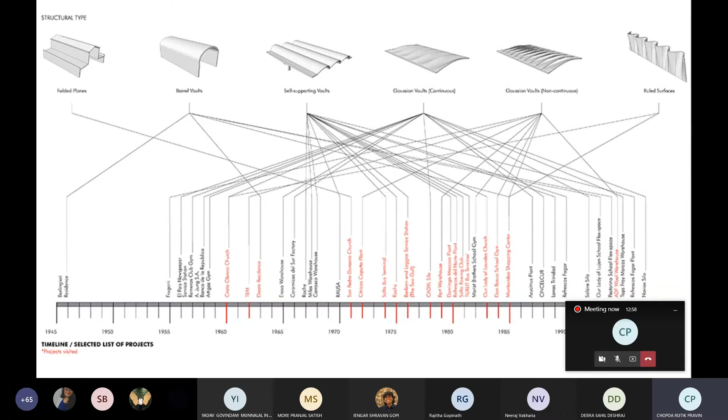This is a timeline we got from the internet, which shows various structures built in various years by the engineer, and it shows the particular roof styles he used in most of his structures, which were unique in their own way. In the next slide...

The material he used was brick, almost exclusively, as the primary structural material for his projects. Bricks are an indigenous material, and they also had advantages over concrete: they were lighter, hence less reinforcement and formwork were required.

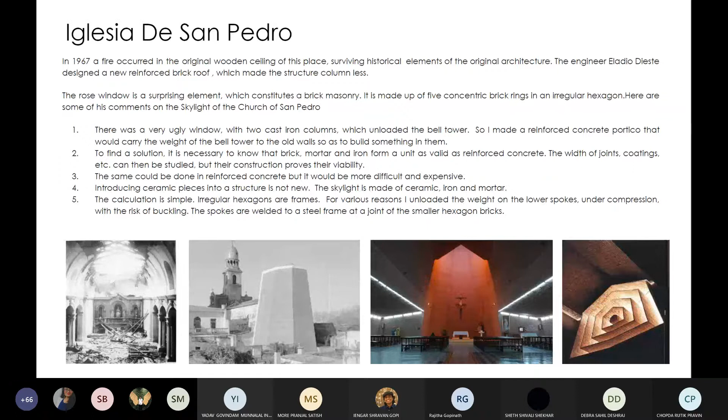The next part we are looking at is the Gaussian vault, one of the innovations that the engineer had done. The Gaussian vault is basically a double curve geometry. Its shape is based on the catenary, resulting in mainly axial compressive forces, whereas most thin wide span roofs have been built using concrete.

Yes, they used brick. And unlike traditional masonry vaults, there is only one brick layer in thickness. There is no separate structure required for this structure of the roof.

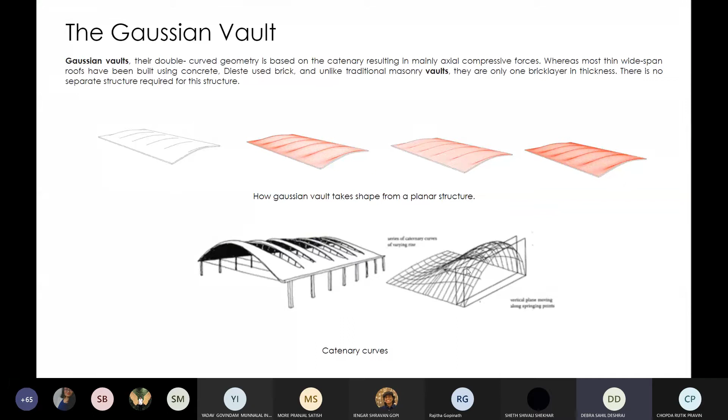In the first image, we can see how the continuous Gaussian vault takes shape, and the other one shows the non-continuous vault. This third picture shows how the catenary curves are taken into consideration while he designed the Gaussian vault.

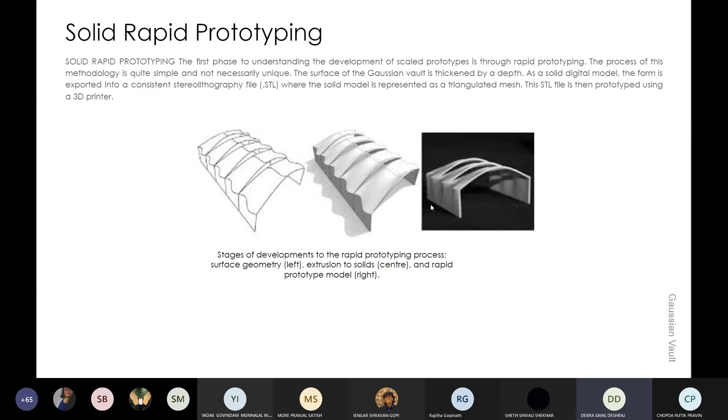There are two different methods of prototyping this vault that he used. The first phase is to understand the development of scale prototypes through rapid prototyping. The process of this methodology is quite simple and not necessarily unique. The surface of the Gaussian vault is thickened by a depth. As a solid digital model, the form is exported into a stereolithography file that is used for 3D printing, where this solid model is represented as a triangular mesh, and then it is 3D printed. These are the stages used for the development of the digital model.

This picture shows how the geometry of the surface is designed, where two sides of the edges of the Gaussian vault are straight lines, and these catenary curves are then made to form a surface of this shape.

The second method is surface prototyping. This method involves experimentation with surface geometry using planar strips. The picture we saw last time is more related to surface prototyping. The smooth curvature of the Gaussian surface is developed into a planar polygon mesh.

To achieve this, the smooth surface is developed using a grid of points applied across the surface geometry. This point grid is then joined together to produce a polygon mesh. Each band of the polygon mesh is then unfolded into a triangulated planar strip. Two planar strips were developed in the lateral and longitudinal direction of the surface geometry to facilitate an accurate, discrete representation of the smooth surface.

This was achieved by switching the skin direction of the surface such that the paths became profiles and profiles became paths. The fabrication of the planar strips involved two distinct sets of vector lines: a set required to cut and a set required to be engraved. With a device such as a laser cutter, each set of vector lines could be distinguished, allowing the production of individual planar strips.

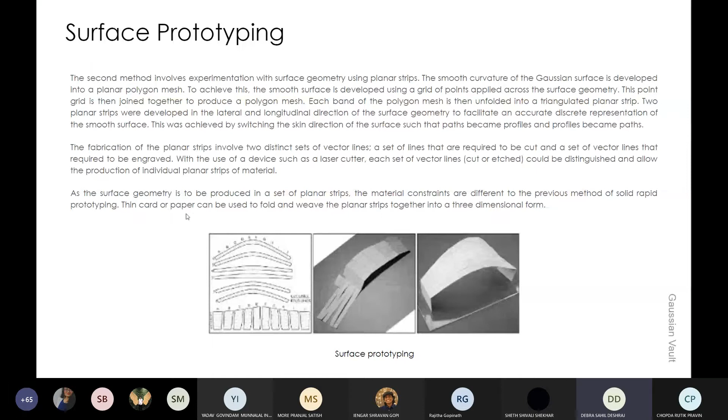As the surface geometry is to be produced in a set of planar strips, the material constraints are different to the previous method of solid rapid prototyping. Thin card or paper can be used to fold and weave the planar strips together into a 3D form. So this is how the form in a prototype is developed.

Then we tried developing a prototype using dough, where we kept a wire mesh. We folded the wire mesh into the shape of those catenary curves approximately, and then cladded it with dough and let it dry. When we removed the wire mesh, it kind of took a similar shape.

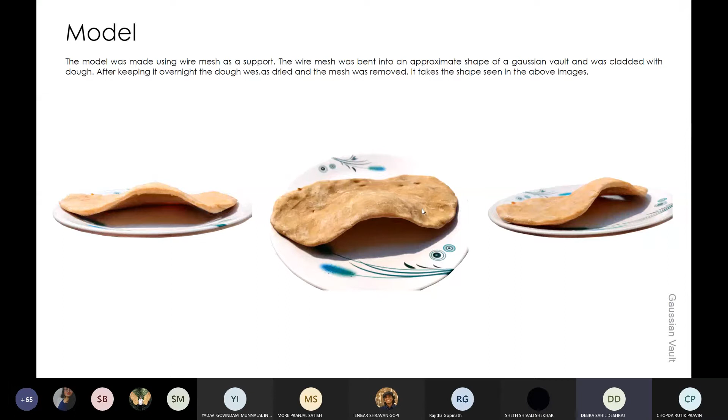There are various projects where the Gaussian vault is used. There are some warehouses, and one of the prominent projects is the Don Bosco Gymnasium. The span of the roof is 25 meters, whereas in the warehouse it ranges up to 50 meters.

The next thing we focused on was the freestanding vaults built by Dieste. The freestanding vault is a single curvature vault that requires a relatively simple formwork to construct, with fewer vertical supports. Dieste envisioned these vaults to float above the wall with very few vertical supports, as you can see in these projects.

The first one is the Refresco del Norte, a double cantilever freestanding vault on two columns arranged in a straight line. The second one is the Salto bus station in Uruguay, where a series of vaults are supported on a single strip of vertical columns.

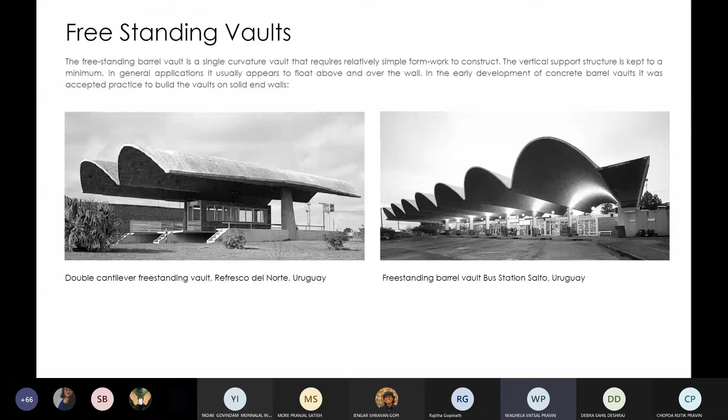Earlier, it was believed that vaults should be supported on end walls or stiff arches to avoid unnecessary and costly buttresses or interfering tie rods.

In Dieste's application, it is seen that he tried something different, wanting to support the entire vault onto a single strip of vertical columns, giving it a light floating element, as in the buildings. He used these kinds of vaults in many large-scale workshops, factories, and warehouses. The cross section is mainly a catenary curve, and the freestanding barrel is used in shorter transverse spans between the springings, up to 10 to 12 meters, with a span-to-rise ratio not greater than 4.

So it is deeper than the Gaussian vault that we saw earlier, and due to this greater depth of the vault and the shorter span, the stresses in the brickwork due to self weight are greatly reduced. Therefore the risk of buckling is not significant, and the vault adopts a simple curvature between springs.

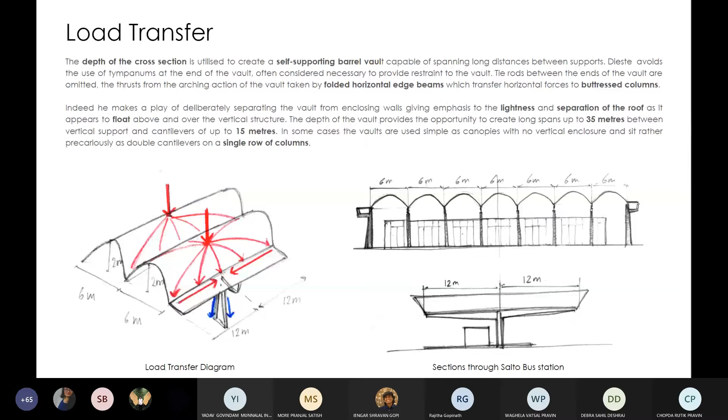So we focus on the sequence of construction in vaults. First, the construction of the supporting column takes place, with reinforcements projecting out of it, to which formwork is attached, on which the bricks are laid in a stack bonded manner, with joints typically 20 millimeters wide. Then come the longitudinal and transverse reinforcements.

Reinforcement of 5 to 6 millimeters in diameter is placed in the joints, over which a cement-sand mix is poured. The brick absorbs moisture from the mortar and starts to stiffen almost immediately. The formwork is usually struck the following day, depending on weather conditions. The edge beam is propped both vertically and horizontally.

As the formwork is stripped, the self weight of the vault is transferred to the props by the action of the catenary arch. The formwork is then moved to the next section, usually sitting on steel rails, raised and lowered on mechanically driven jacks. Great care is taken in aligning the formwork to the previous section of the vault, to facilitate continuity of the reinforcement and the visual integrity of the soffit of the vault, usually left as exposed brickwork.

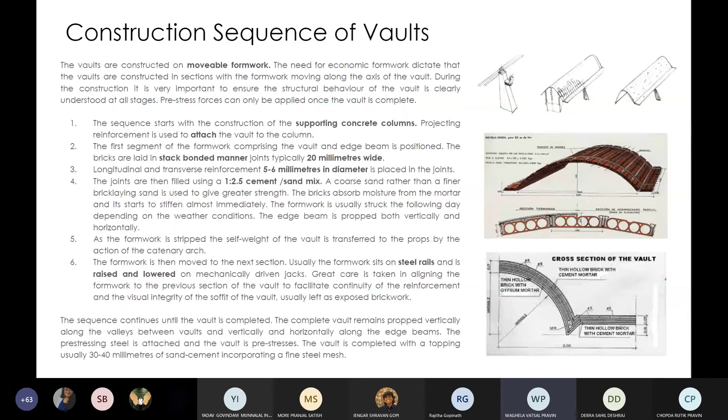So after construction of the vaults, he really focuses on pre-stressing the vault, so that it can counteract the stresses that occur when subject to loading. Pre-stressing is done along the crown of the vault, and also applied at the junction of the edge beam and the vault, or the valley between the vaults.

This shows the pre-stressing along the crown of the vault. He developed a method of using welded loops of steel, placed on the crown of the vault and anchored using steel reinforcements bonded into the vault at each end. Between these ends, the loops are free to move. Pre-stress is produced by pinching the wires together at the midpoint of the loops and stretching them into a figure of 8. This tension in the wire pre-compresses the vault.

The length of the loops and the distance between the long sides determine the level of pre-stress. Once the wires achieve the required extension, they are held in position by metal clamps. The wires are then covered by a thin concrete screed.

By adopting this technique, the benefits are that the pre-stress force is distributed over a large area at the anchorage, avoiding high local stresses. The pre-stress is held within the thickness of the topping of the vault, and is applied using a very simple jack without hydraulics, which can tension a number of wires simultaneously. The diagram here shows the condition of the crown before pre-stressing and after pre-stressing.

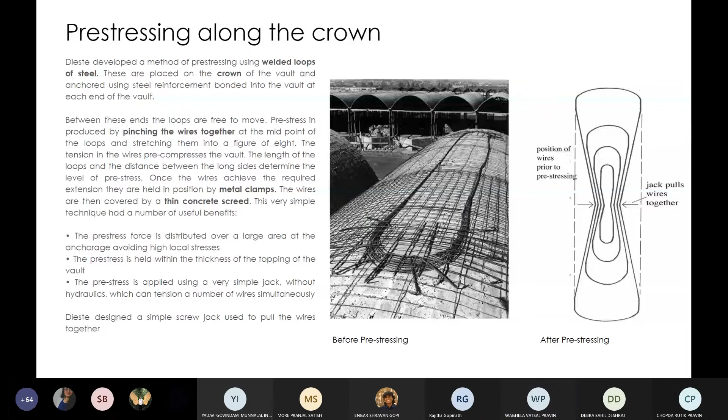Pre-stressing is also done at the edge, but a different system is adopted here. He uses overlapping loops of pre-stressing steel with their ends anchored firmly into the walls, and again he has developed a special jack, which is seen here in the diagrams.

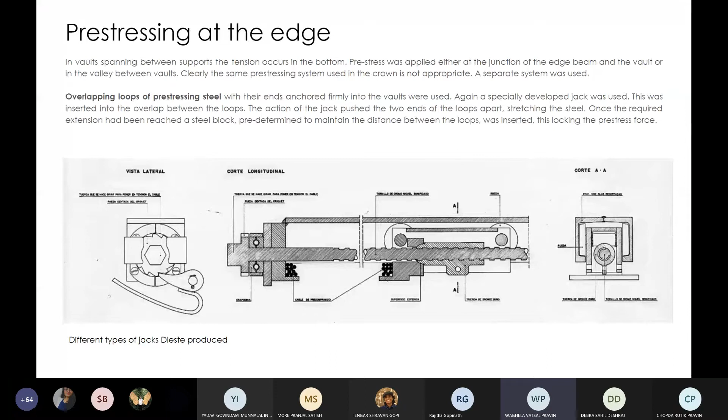The vault is again pre-stressed over the crown and at the edges, and the thickness of the vault is kept around 100 millimeters, comprising a rectangular extruded hollow clay unit of 70 millimeters, on which 30 millimeters of sand cement topping is provided. The maximum width of the edge beam is 2 meters.

Typical of many of Dieste's buildings, there is clear visual separation of the roof from the walls, so that the structure can be seen as lighter. The roof is also supported on a series of concrete columns independent of the enclosing walls. The space between the underside of the walls and the roof is enclosed using glazing, particularly noticeable at the gable, to clearly show that the walls offer no support to the roof.

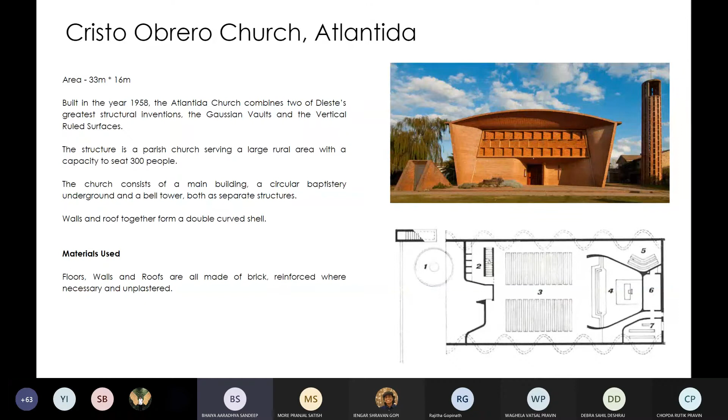The walls and roof together form a double curved shell. The material he used for the floor, walls and roof is all brick, reinforced where necessary, and left unplastered.

The walls have a height of 7 meters, and their thickness is 300 millimeters even all around. The reinforcement used in the walls was steel wires of 1/8 of an inch, and the cavities were filled with waterproof mortar.

The walls are formed by conoidal surfaces, straight on the ground and undulating at the top. Each wave consists of a central segment of a parabola and two half segments. The wall is crowned by a very thin beam, constructed of brick and concrete mixed together, which forms the eaves and takes the thrust of the wall.

In this sketch, we analyzed how the beam actually helps in stabilizing the wall.

This series of circles and the curves joining their edges shows how the construction took place, how the form and curves of the wall took place.

In this sketch, the forces F1 and F2 act over a wave. F1 is the force exerted by the crest of the wave, and F2 is the force exerted by the trough. We analyzed that the resultant of these two forces stabilizes one complete wave, and thus the entire wall.

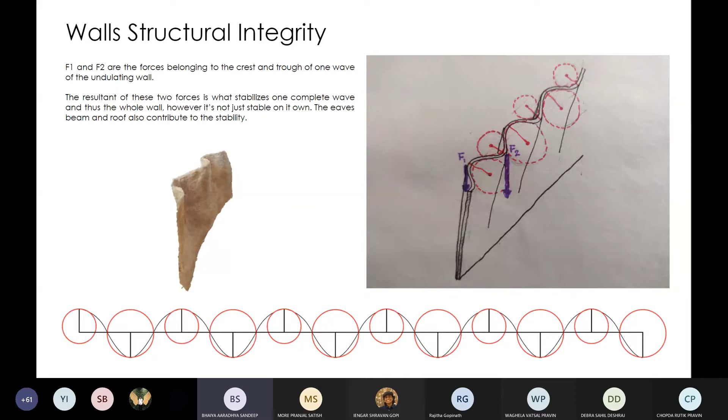This is a detail at the eaves. At some places the eave protrudes a little more, and at other places it protrudes a little less.

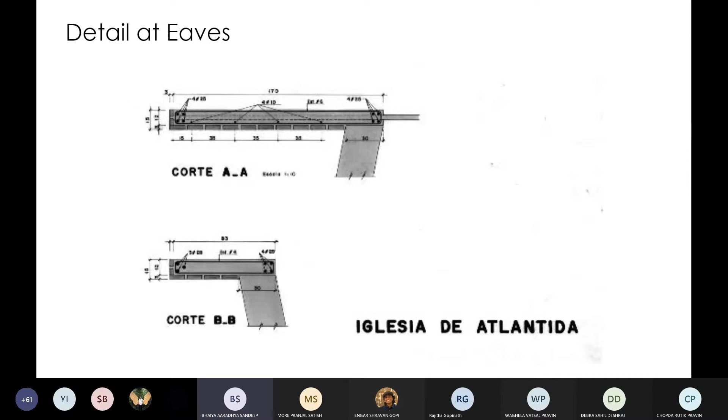So the roof has a mean span of 16 meters, and its thickness is just 110 mm. It's very thin and appears to be very light, and it's a Gaussian vaulted roof. The rise of the roof varies between 70 mm to 1475 mm.

The roof is a continuous Gaussian vaulted structure with an aperture in the center so that light comes in, and the wave valley is almost horizontal. The tensors are anchored to the beam, the eaves beam at the top of the wall, and they also help in absorbing the thrust of the wall.

Together, the vault forms a shell with two hinges, which has great transversal rigidity, and the union between the ruled surfaces of the roof and the walls introduces a particular instability that causes a strange effect of the layers of brick inside when a person looks at it from the inside.

So in these sketches, we analyzed how a normal roof with a typical design would take the load. Over there, when the edges are very sharp and the walls are perpendicular to the roof, that is how they take load.

However, in this case, the load is evenly distributed, and the slant and undulating surface of the walls is actually stabilized by the load coming onto it from the eaves beam and the roof, and that is how it gets stabilized.

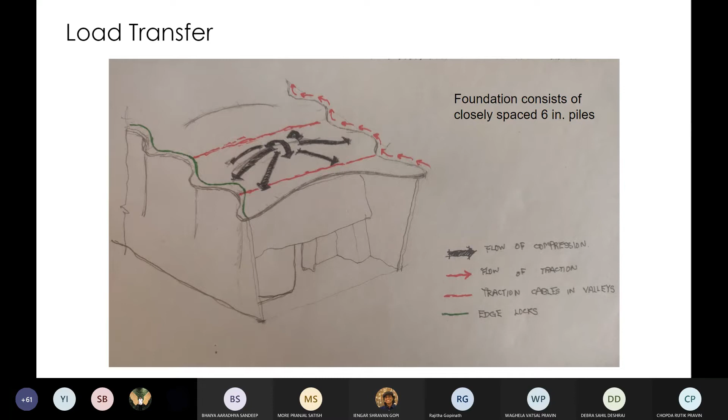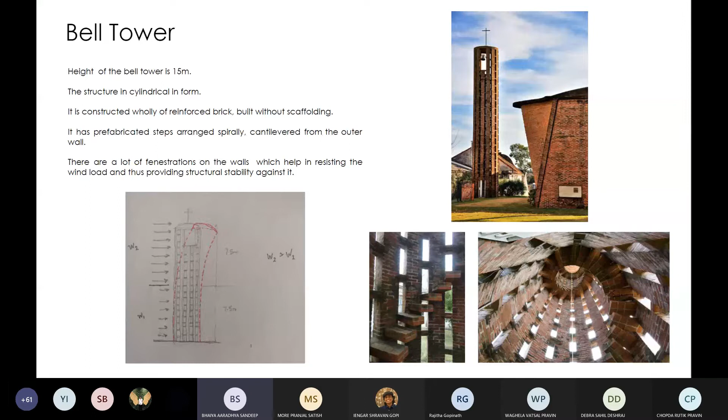Yes, and these are the references, the websites we provided. Thank you.

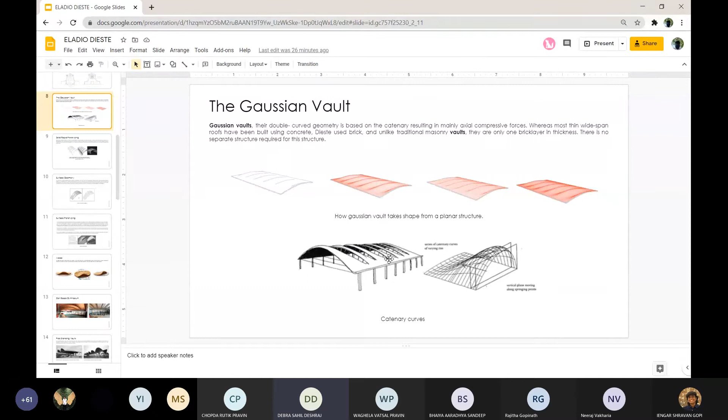For example, if we look at this structure in the gym that they've made, the basketball court, you can see how light is entering through that part of the roof. Right, so it acts more like an arcade than an actual barrel vault, a mix of an arcade and a barrel vault, does it? Yeah. Okay, thank you.

Atharva had a question. Can you just go to the next slide, the 14th one? Yeah, so I didn't understand these freestanding vaults, how the cantilever really works, that I didn't understand.

Yeah, Sahil, can you go to the 17th slide? It would be easier. Atharva, here, can you see the sections through the Salto bus station?

Yeah, so here what he has done, he has used a single buttressed concrete column, which is very big, and to which a large edge beam is supported, and onto which there is a light brick vault, which is catenary in nature. So that transfers the load equally to the edge beam, which transfers again the load to the vertical buttressed column.

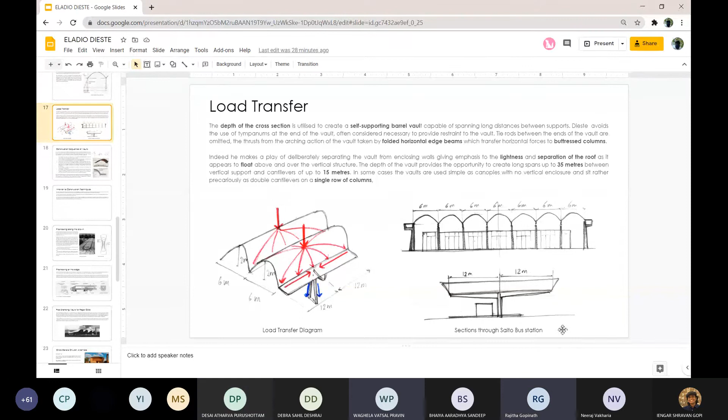If you go to the previous slide, where he's using the butterfly vault over a petrol station or something, it is not equally spaced, it is off center.

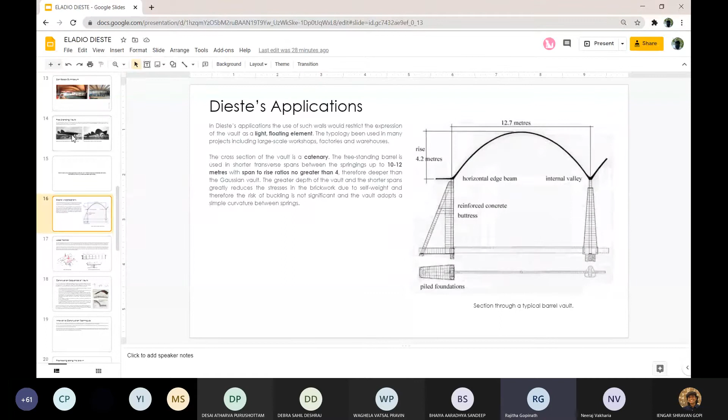Go to the previous one.

This one, the freestanding structure shown on the left side, that's not centered, right? Yeah, off center. That's why I was asking. Yeah, this is off centered, right?

It is meant, I think, for a petrol station or something like that. Yeah, how does this work? So, does somebody else have a question here?

Nobody else has any question.

Okay, yeah, just explain how do you think this has been supported?

Yeah, Vatsal, go ahead.

I was saying that the concept he used was similar in all of the vaulted structures that he used, but here I think there are only two double cantilevers in a freestanding wall, he has achieved the irregular cantilevers on both ends.

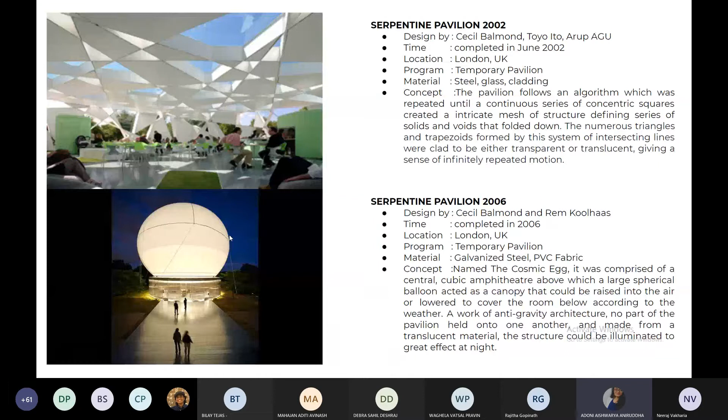This is Aishwarya. Serpentine Pavilion 2006, as you can see the names are the same. Cecil Balmond had this series of Serpentine Pavilions in which he tried to redefine what a pavilion meant. The 2006 one was in collaboration with Rem Koolhaas and completed in 2006. It was a temporary pavilion, and the focus of this pavilion is the cosmic egg, used as a canopy over the pavilion, which could be raised or lowered according to the climate or the time of day.

Hello, Tejas. Hello, can anyone hear me? Can everyone hear me? I can hear you, but I can't hear Tejas. Okay, I'll continue from where he got disconnected then.

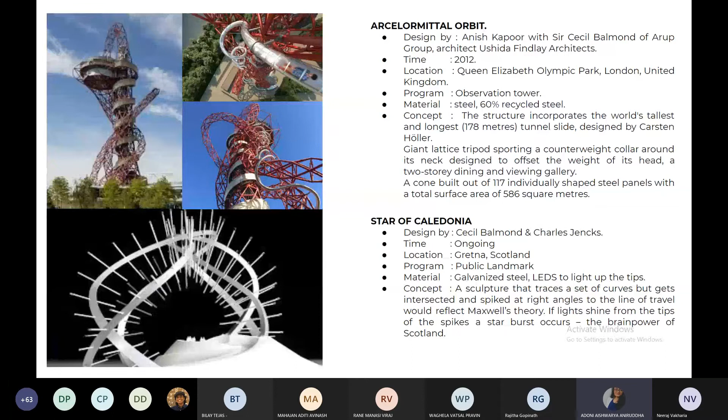The Star of Caledonia is an ongoing project in Scotland, a sculpture that traces a set of curves with spikes at perpendicular angles which light up because of LEDs stuck on the tips. Balmond had this artistic approach, blending art and science to bring about design solutions and solve problems.

One of the major features of Balmond's work is the diagrid framing system, which he uses in a lot of his structures. It's basically a framework of diagonally intersecting beams, which can be of any material. In this system, the load follows a diagonal path following gravity, helping transfer lateral loads to the ground. This transfer of lateral loads is very important in areas with high seismic activity.

There are a lot of advantages to this system over the traditional column and beam system. One is that it reduces the material required by about 20%. Because it's an exoskeleton kind of system, it sits on the external part of the building, opening up the space inside since there are no columns or beams in the middle, providing an open space and open plan.

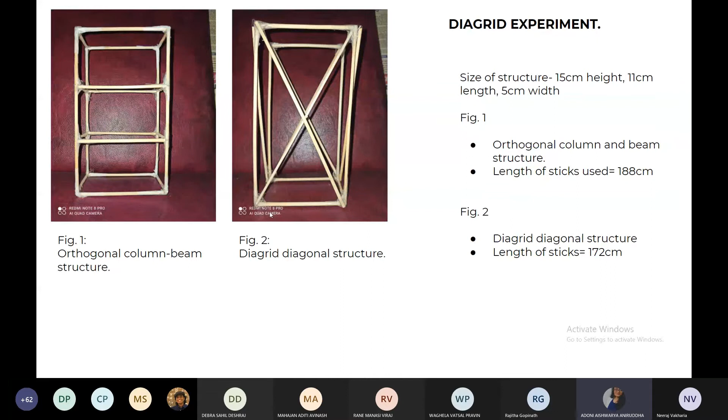The first building by Cecil Balmond which we did a detailed study of is the CCTV headquarters — China Central Television headquarters. It is 243 meters tall and is a three-dimensional loop. It's made of two towers shaped at 90 degrees at the top and bottom, and primary support is mostly provided by the diagrid exoskeleton system, which helps in load transfer. This building was done in collaboration with Arup Group and was completed in 2012.

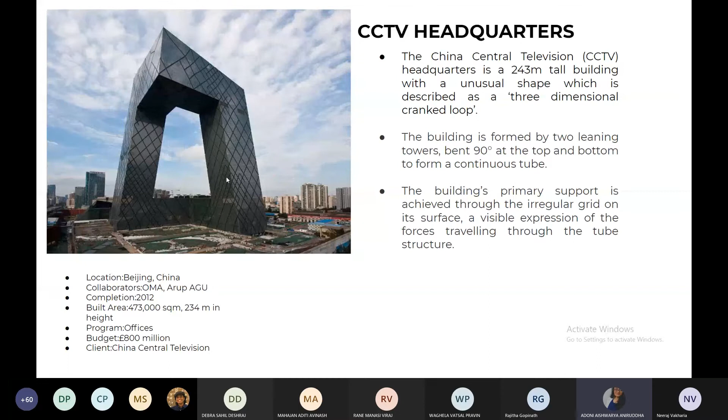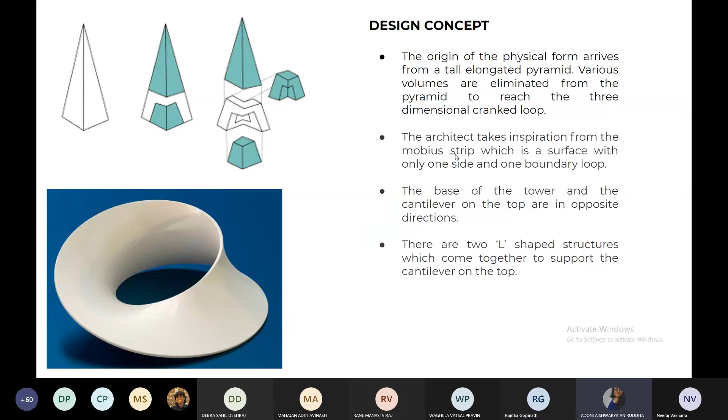The design concept of the building is our analysis of how the form might have come into existence — like an elongated pyramid where mass was subtracted in specific ways. The first chunk was cut off from the top, the second taken away from here, and the third from here, with the two L's in opposite directions. We also thought the architect took inspiration from the Mobius strip, a continuous loop which is one surface with one edge and one boundary. There are two L-shaped structures which also support the cantilever on top. This is how we thought the design concept might have come into existence.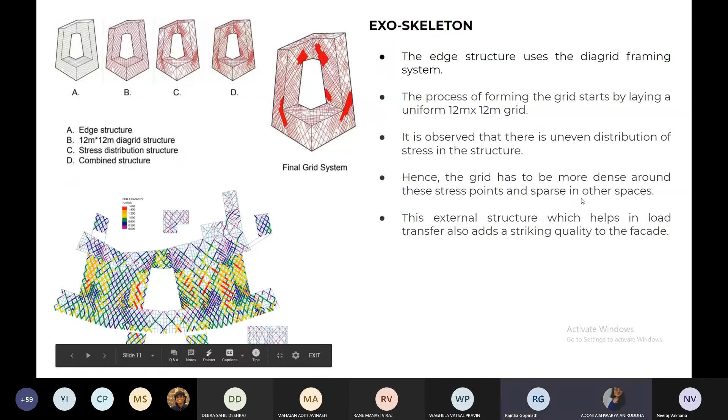As this is a massive building, there were massive loads acting on it. The vertical load consisted of gravity, dead load, and live load. And as this building is situated in a seismic activity zone, they also had to consider those loads in the lateral loads. High wind pressure also acted on this building.

The majority of the load transfer happened through the diagrid, that is through the diagonal members, while the internal cores took minimal amounts of gravity loads. And as it had fewer columns, the floor slabs were free, like it was more of an open plan, and floor slabs didn't take much of the load.

While constructing this, they had to assess wind diagrams of over 100 years, as Beijing's max wind speed is around 11 meters per second.

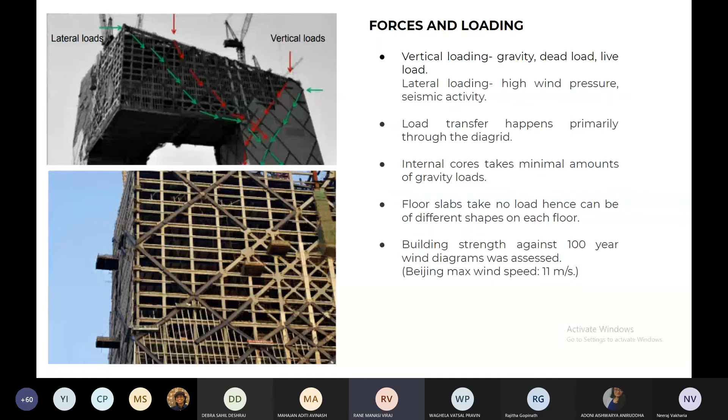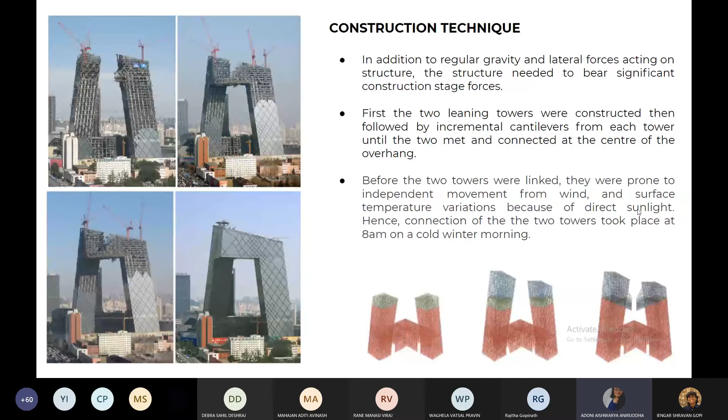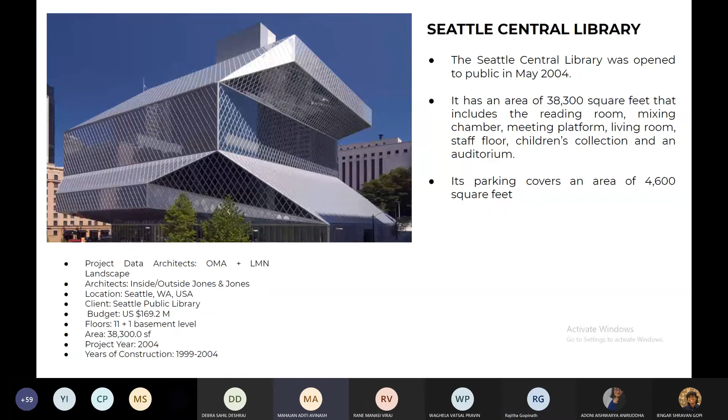So the second building we studied was the Seattle Central Library. Construction started in 1999, and it was opened to the public in May 2004. It has a total area of 38,300 square feet, which includes the reading room, mixing chamber, meeting platform, living room, staff floor, children's collection, and an auditorium. It has a total of 11 floors plus one basement level, and its parking covers an area of 4,600 square feet.

The design concept looks like a stack of books arranged on top of each other. The main intent was to give an illusion of floating boxes with minimum load-transferring members like columns and girders. The concept involves reinventing the library as an access point to information presented in a variety of media.

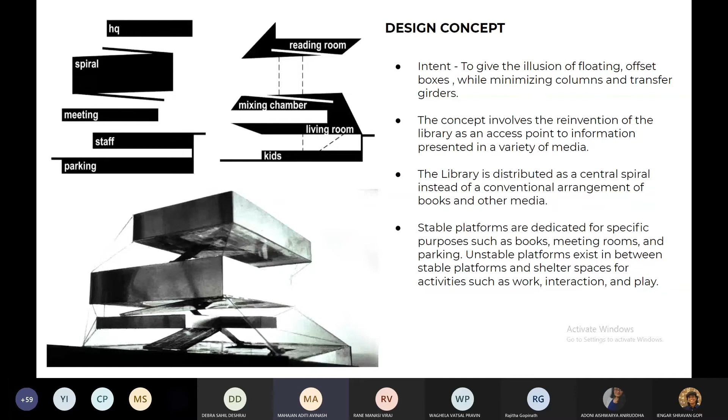It is distributed as a central spiral instead of a conventional arrangement of books and other media, so it has stable platforms and unstable platforms. The stable platforms are dedicated for specific purposes such as books, meeting rooms, and parking, while unstable platforms exist between stable platforms, used for activities such as work, interactions, and play.

The structural system is composed of a load-bearing and seismic system. It has a central concrete core which provides rigidity to the whole structure. The load-bearing system consists of columns and beams which support the cantilevered or elevated platforms, and the seismic structure is for the facade, which has a lattice-like geometry connecting the platforms to one another.

Soil and foundation system: the majority of the site contains stiff to hard silt with fill. The fill is disturbed soil from prior excavation activity, and it is not suitable for foundation support. The foundations used are spread footing foundations, and the core carries gravity loads but resists minimal lateral forces.

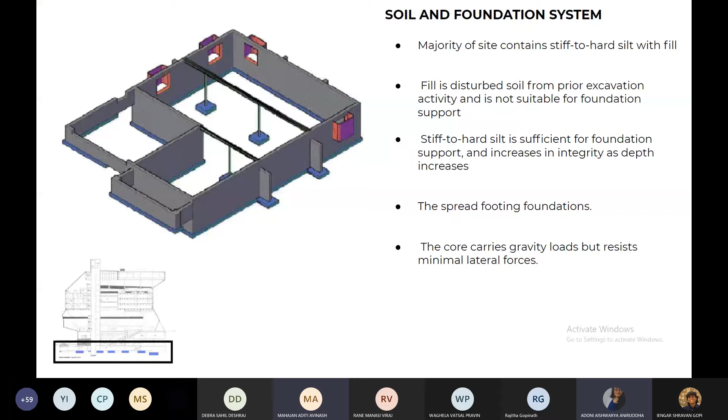To minimize columns and girders, many columns are skewed to connect to each other in plan. Columns at the corners were pushed back to give the floating effect. The skewed columns transfer gravity loads and maximize counterbalancing opportunities, creating a thrust which is then transferred to the floor diaphragm that connects to the central core or to other columns.

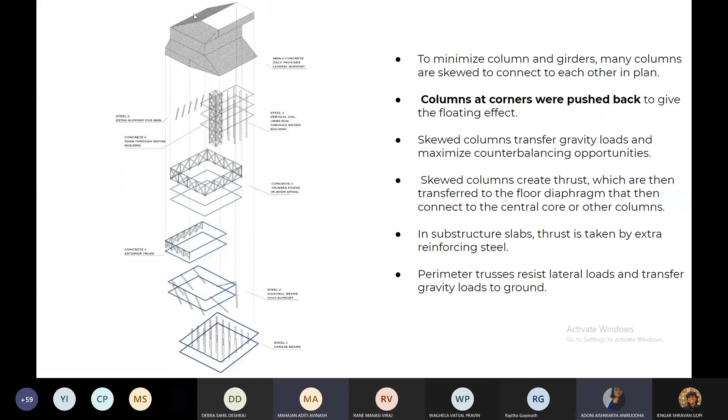In the substructure slabs, thrust is taken by extra reinforcing steel. Perimeter trusses resist lateral loads and transfer gravity loads to the ground. As you can see here, the external skeleton is used to take lateral support, like the one in the CCTV building as well.

The facade consists of the seismic grid that ties the platforms together, preventing them from tipping over. These grids are made from 12-inch deep wide flange members. It works like a giant brace frame, collecting seismic forces from each platform and transferring it to the concrete base.

These grids are made of units of diamond shaped frames, which have dimensions of 4 by 7 feet, and they are oriented from 21 degrees to 45 degrees from horizontal and up to 84 feet in length.

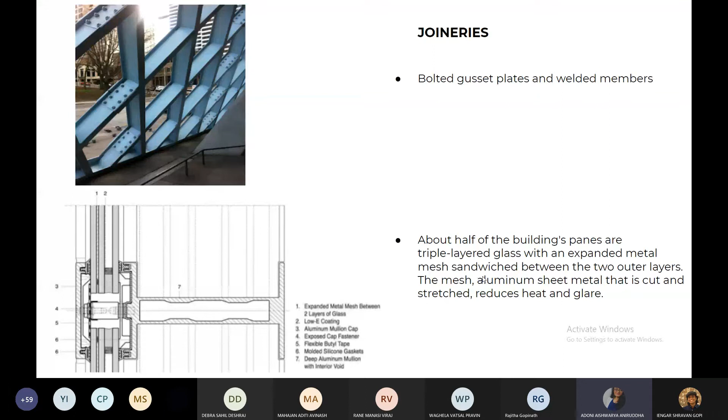There are various joineries used to create these grids, including bolted gusset plates used to connect the welded members. Half of the building's panes are triple layered glass with an expanded metal mesh sandwiched between the two outer layers. This is mainly to reduce heat and glare, since the facade is glass, and to help not overheat the building, the mesh and aluminum sheet metal is stretched, sandwiched between the two outer layers.

In conclusion, Balmond solves any structural problem scientifically and yet manages not to lose out on the design aspect. For example, most of his art structures and buildings are more asymmetrical and go beyond conventional notions of stability.

Cecil Balmond uses simpler and lesser known systems for solving complicated problems, like how the transfer of lateral loads was done through the diagrid system. He also uses a single module and repeats that same module throughout the building system in a very different way, which helps him create interesting structures.

And his keen artistic sense helps to create architecture through structure. The structure itself gives life to the architecture. Thank you.

So Aishwarya, it was just you and Mansi, nobody else? Oh no, Aditi was there too, I think we have similar voices. And Tejas, he got disconnected in the middle, we had to take over his part. But he couldn't rejoin, I think? Yeah, but he's done the work.

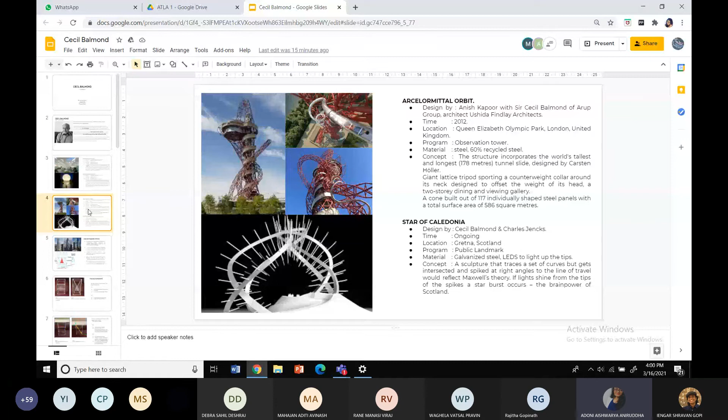Like in this, the ArcelorMittal Orbit, it looks like this very unconventional mesh, it almost looks like worms. It's kind of uncomfortable to look at, but at the same time you want to slide down that large slide. Even the cantilever, you're almost afraid to stand underneath that overhang because it looks so heavy and chunky that you're sure it's going to fall on top of you. But that's the beauty in his structure, it won't fall because he's made sure that it doesn't.

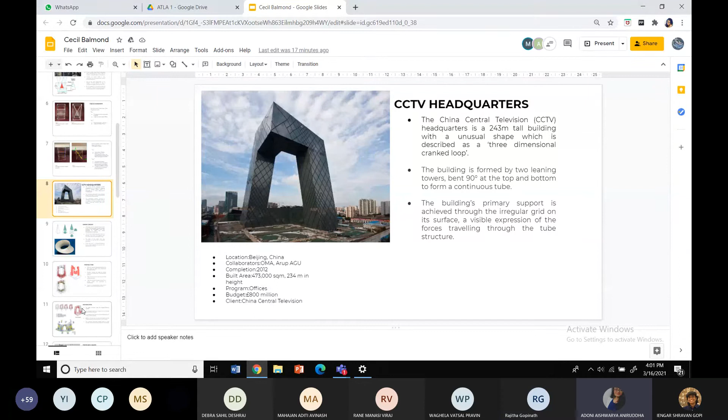Do you think his structure could be made more lightweight? Because this is a skyscraper, it is 243 meters tall, very large, and the budget here was 800 million pounds. So if he's used that much money, he's tried to cut back as much as he could and still make the structure stable. I think this is the best possible outcome he could have gotten, as lightweight as he could have made it, because as we said, he even used the transfer trusses.

Because these trusses, the material is being used only in those trusses, so the plans in these towers, which mainly have conference rooms and office blocks, are open. Even in that, instead of having beams and columns run here, he has reduced as much material as he can. I think the form itself is very bold and overpowering in that way, we feel the material used is a lot, but I feel he has tried to use as little as he could and still achieved this.

Okay, anybody else have any questions? Everybody understood the system he used? No one? Nobody has any questions, okay. Let's get somebody else, we have half an hour. Okay, thank you.

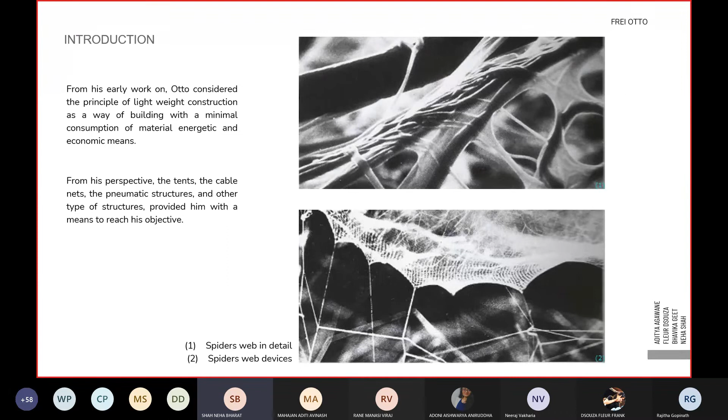Hi, this is Neha. He concerned himself with the idea of families growing and shrinking again, as a result of which he devoted himself to finding solutions for mobility, growth, change, adaptability, and flexibility in expanding cities. He considered lightweight construction as a way of building with minimal consumption of material, energy, and economic means. Tents, cable nets, and pneumatic structures all provided him a means to reach this objective.

Hi, this is Bhavika. Otto's architecture method was highly inspired by nature. He was interested in the fundamental relation between architecture and nature, and promoted alliance with ecology, sustainability, and the protection of natural resources. These principles formed the backbone of his practice of creating spaces using minimal material, adaptability, and lightweight structures.

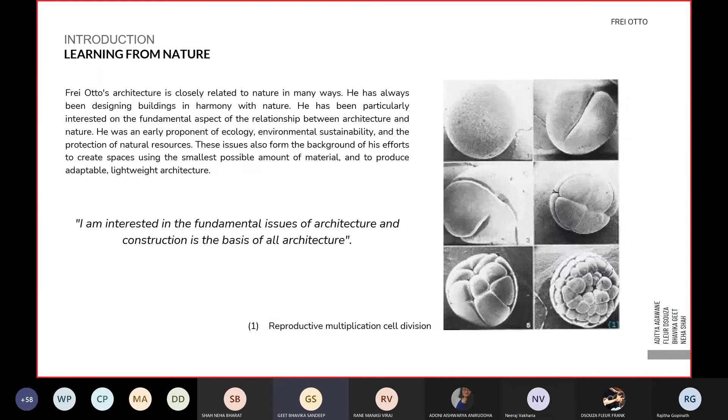It's Aditya. As a scientist, he spent his whole life studying the form-finding process of nature, and as an architect, he used these processes to develop and build many structures—constructions which reveal the process of creation with particular clarity. Form-finding processes are those which, given a specified set of conditions and following the prevailing laws of nature, give rise to visible forms and construction under experimental conditions. Since they take place without human intervention, they are also termed autonomous formation processes.

This is the Munich Olympic Stadium for 1972. Architect Gunther Behnisch and Frei Otto were in charge of designing the stadium at Munich for the 1972 Olympics. The proposal focused on a continuous undulating translucent roof covering 80,000 square meters of landscape. They raised a lightweight structure where tensions are nullified by a system of supports and cables, using mathematical calculations based on computational procedures to determine the shape and behavior of the surface cover. All the functions were conceived as a series of molded earth forms covered by the lightweight umbrellas.

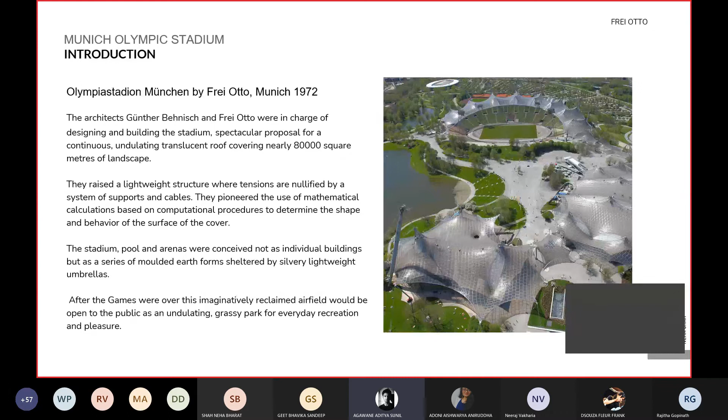After the games were over, the whole imaginatively reclaimed airfield would be open to the public for everyday recreation.

The roof is considered a lightweight tensile and membrane construction, covered in acrylic glass panels, with the suspended membrane delicately floating above the stadium. For the stadium, the span was 10 times larger, which presented Otto with major structural problems. But he found the solution and subdivided the circular roof into 9 sections, each measuring 80 meters long and 60 meters wide.

The 8 outer masts with edge cables held the net together at each of 10 nodes. The cable nets formed the framework, which was pre-stressed to take the loads and then curved in opposite directions to be tensioned at right angles to the horizontal cables, giving it a saddle shape.

Based on the concept of tensile structures, the masts and cables are the key structural components. The saddle-shaped nets of 25mm steel cables create a roof grid, and the saddles span up to 65 meters and reach a maximum height of 58 meters. The nets are supported by 8 tapering masts behind the stadium, ranging from 50 meters to 70 meters in height.

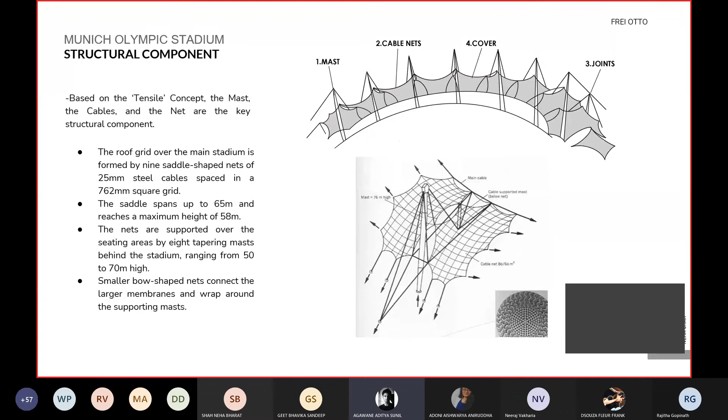These are the structural components: the mast is the support. It supports the main cables and maintains tension by hanging the roof surface support, and it also transmits the loads to the foundation.

The second component is the cable net, made of strands spaced 762mm in both directions. Then the joints—the junctions of various cables that make up the structural mesh—are materialized by a knot of steel casting using a system of bolt anchors and tension, which helps transfer the load from the mast to the cable.

Then the roof cover is made of acrylic panels laid on the cable net and bolted to the intersection nodes. The panels are flexibly connected to the net by supporting them on rubber buttons, and the joints between panels are sealed with neoprene strips.

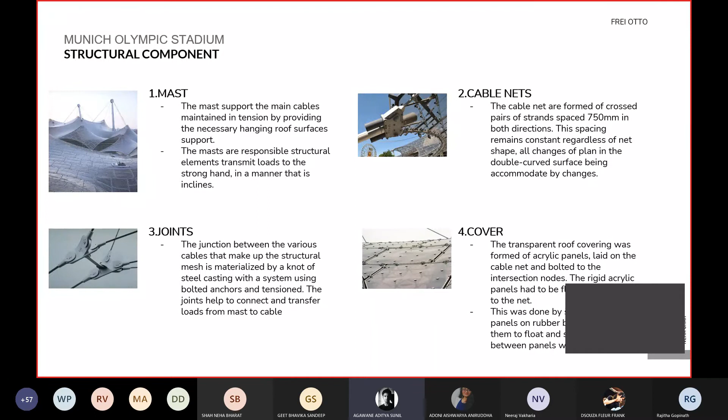The cables are doubly curved, resulting in a double-curved saddle shape, which prevents the canopies from easily fluttering in the wind. The total length of steel cables in the complex exceeds 408 kilometers, and tension loads in the cable net are as much as 5,000 tons.

Originally, the foundation was intended to consist of pre-stressed anchors, but local code officials insisted on more conservative piers to provide stability. In some cases, these piers are as much as 18 meters deep and 6 meters wide.

So the construction details: the foundation. Tension foundations were needed to anchor the main cables down to the earth, which had upward pulls of up to 50 meganewtons exerted on such foundations. Three types of foundations were used: inclined slot foundation, gravity anchor foundation, deriving their anchoring effects from the self weight plus the weight of the soil surcharge.

And the earth anchor foundation is 40 meters deep, which needed to support the mast, the cable nets, and the joints.

The net was formed from strands spun from 19 heavily galvanized steel wires with a lay of 10 times the lay diameter, and the main cable composed of five strands from between 37 and 109 wires each, held at high tension to control the deformation of the roof from snow and wind load. The edge cables vary in specifications.

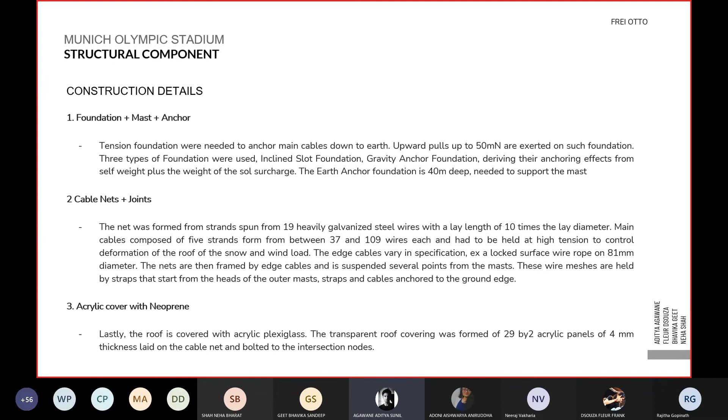To accommodate some of the movements, the footings of the mast consist of rubber bearing pads on concrete bases. Temporary steel balls were provided under the rubber pads to allow rotation during assembly.

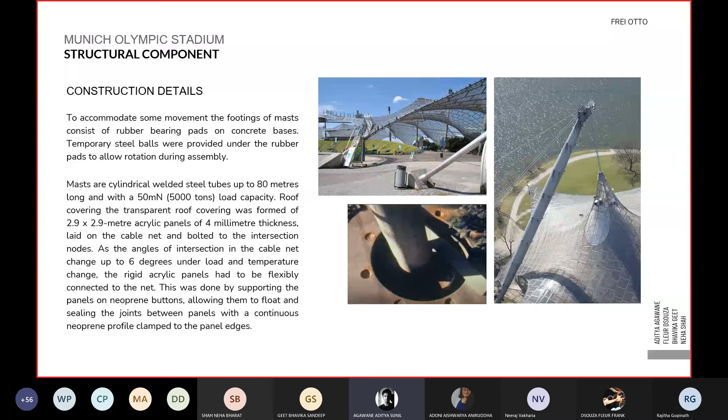Another one of Otto's projects was the German Pavilion at Expo 67. It was a collaboration with Rolf Gutbrod and was built in Montreal.

This project acted as a turning point in his career since it brought his experiments with tensile structures to an international stage for the first time. It served as a potential for technological advancement, prefabrication, and mass production in the future of architecture.

He believed that tensile tents promised a solution that was cheap, durable, and very versatile. He also preached that there was a need for temporary structures as they were easily assembled, taken down, and recycled. With few components, all of it could be adapted to any site or terrain.

Montreal experiences mild summers and harsh winters. The pavilion was a prefabricated structure. After manufacture, it was assembled on site in 6 weeks and was dismantled after the fair.

It is a landscape of hyperbolic paraboloid curves which show off the beauty of mathematical and physical relations of structures in an age where computer-generated solutions weren't available. The core structure is put together using suspension points and anchor joinery. Around the perimeter of the site, the tent dips to the ground and then rises around the masts.

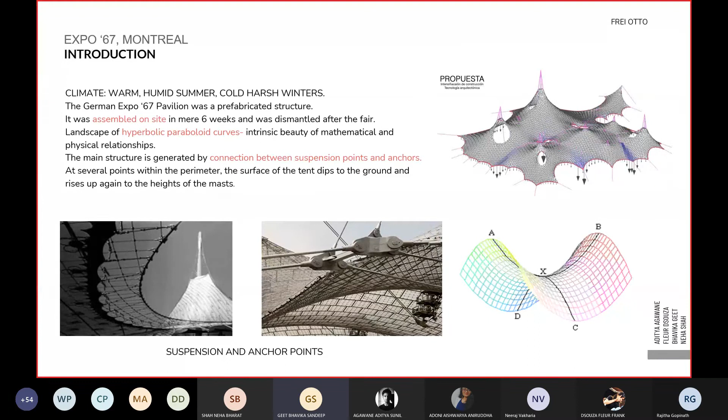The elements used in the structure are, first, the mast. The needle-like masts are hollow steel tubes which vary from 14 to 38 meters and are 8 in number. They taper towards the top.

Then there's the pre-stressed mesh cables which hold the mast and the net together. The roof, a pre-stressed textile membrane of 9,500 square meters, is a translucent weather skin made of PVC. This entire setup is held together by 31 anchor points around the periphery of the site. There are wind deflector glasses 2.25 meters high on all sides.

The process for construction was that first all 8 masts were positioned and stabilized using brace cables 12 mm thick. Then the cable mesh was delivered in unit rolls of 9.5 meters and joined on the ground and pulled up to the masts.

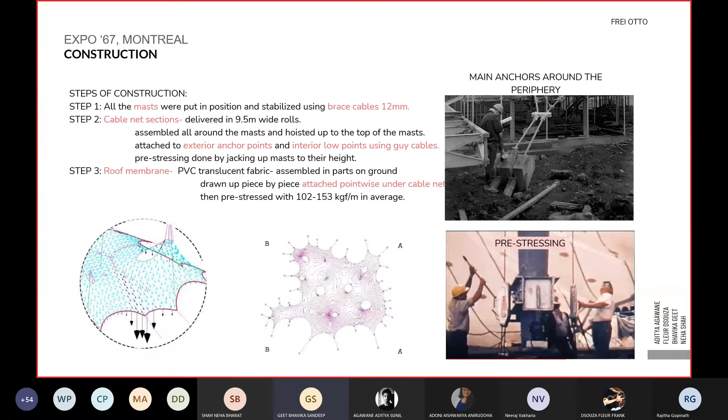On the exterior, they were attached to the anchor points using guy cables. The translucent PVC roof membrane was installed under the steel mesh by drawing them up piece by piece, and then it was pre-stressed with 102 to 153 kilogram force per meter.

Then these are a few pictures of the details used. First is the steel mesh cable. The joints, that is the thick cables, are 50 centimeters thick.

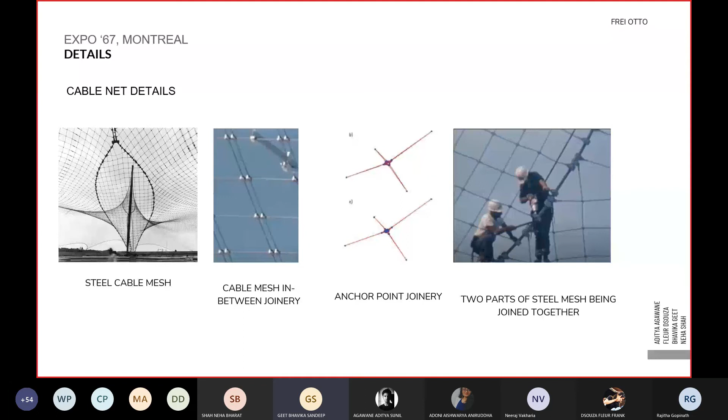The second picture shows the in-between mesh joints which are soldered and the anchor points between various pieces. Then the next picture shows the various meshes being joined together.

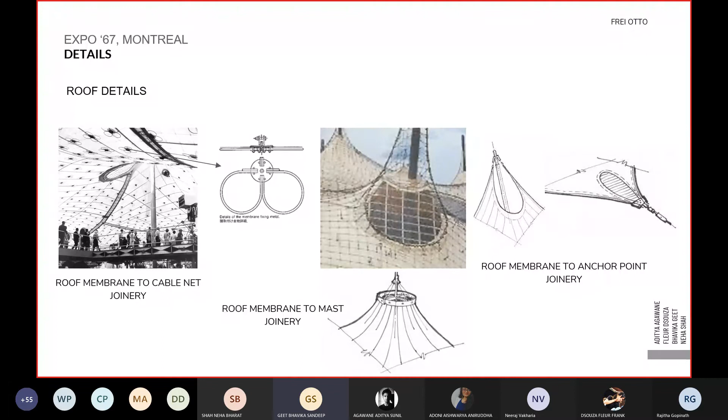This is a photo from the inside showing the loop joinery of the roof membrane to clip it onto the cable skeleton. Then these are the loops formed for opening at the top for ventilation. These are covered by aprons which are opened during the summers and closed during the winters to trap heat.

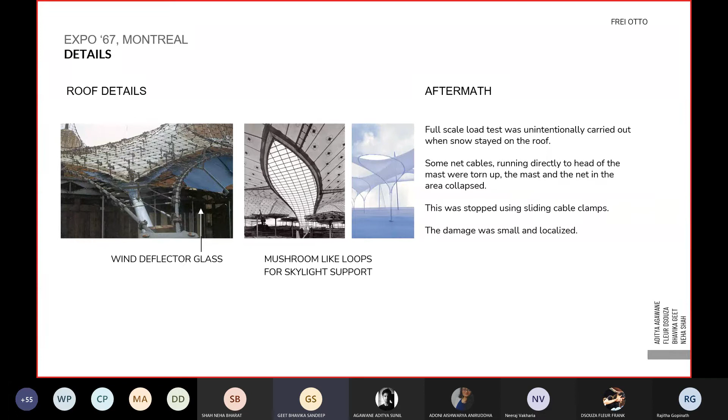There was a load test performed unintentionally when in winter the snow stayed on the roof and led to the breakage of some net cables connected to one of the masts, which tilted a bit and the net around it collapsed. Since the damage was small and localized, it was easy to repair and was done using sliding cable clamps.

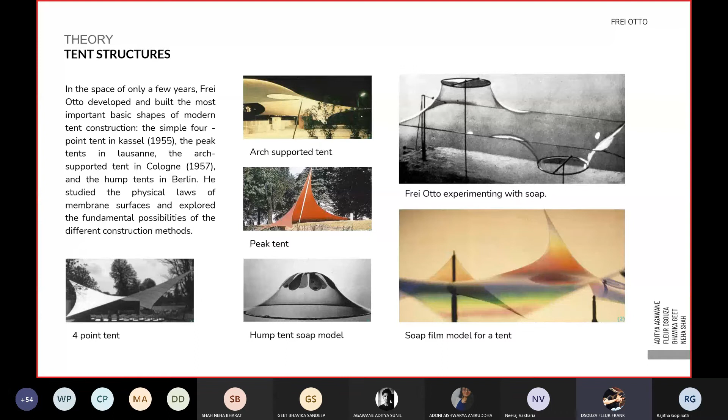In many of his experiments, he used soap film to create membrane surfaces in his models, like this one. The soap film forms a spatially curved surface that has specific physical and geometrical properties. The surface of the soap film is termed a minimal surface, as it encloses the smallest possible area within a closed space curve. Can you move to the next slide?

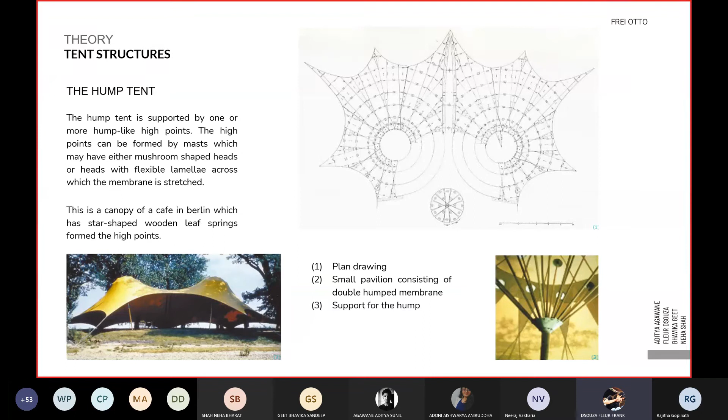One of his tent structures is the hump tent. The hump tent is supported by one or more hump-like points. The high points can be formed by masts, which have either mushroom-shaped heads or heads with flexible lamellae across which the membrane is stretched. This is a canopy of a cafe in Berlin, which has star-shaped wooden leaf springs formed the high points. Basically, this is how the support looks for the hump, for it to have a rounded edge. Next.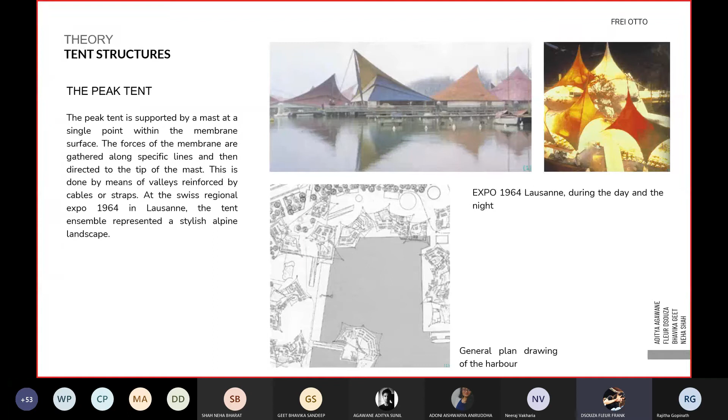The term membrane is generally used to describe a flexible and thin surface under tension. Mounted on simple supporting structures, membranes can be used to build tents. Tents are one of the earliest mobile and transportable shelters created by human beings. In his dissertation, The Suspended Roof, Frei Otto discovered the tent, formerly considered a temporary, humble, and rather unstable affair, for architecture in the 1950s. This is one of his continuous membrane study drawings. Next.

The peak tent. Thanks to his development of membrane structures during the subsequent decades, this became an accepted, efficient, high-quality form of construction. In the course of this, he noticed that membranes could not only be designed freely, but their shape evolved in an autonomous self-formation process within the given specifications.

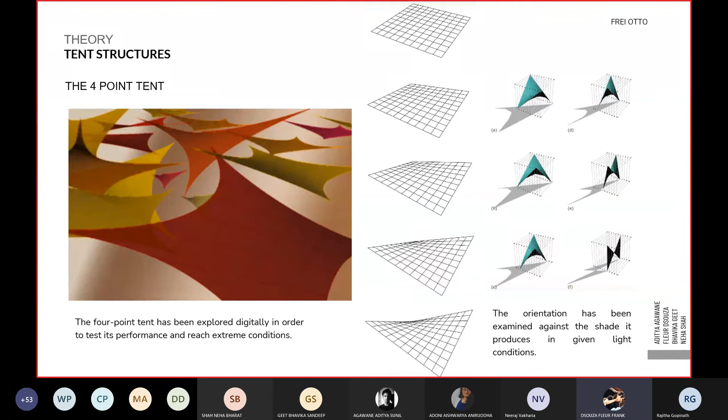The four-point tent has been explored digitally in this diagram in order to test its performance and reach extreme conditions. Here, this is a sort of drawing showing how the anticlastic surfaces are obtained, and this one examines the orientation against the shade it produces in given light conditions for four-point tents. Next.

Net structures. Cable nets are essentially subject to the same laws as membranes. However, the steel cables allow the construction of canopies with far greater spans than membranes. All the tent types can also be realized using cable nets instead of membranes. Unlike membranes, cable nets do not require a specific pattern to form anticlastic surfaces.

When a net is stretched into a saddle shape, its square or rectangular meshes turn into diamond shapes. If it is possible to change the angles between the cables, the cable net can assume the shape of any surface which has a regular curvature. Thus, it is the edges alone that must be shaped.

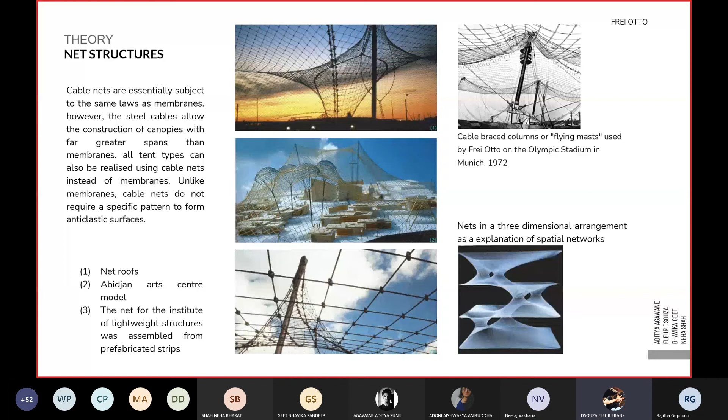Arches, vaults, and shells. If we look at the right-hand side diagram, it is a model of the investigation of the load-bearing capacity for the Pantheon in Rome. Frei Otto developed 2- and 3-dimensional suspension models and provided information about the distribution, size, and course of the pressure forces.

We tried to make a model based on this concept, but the string had a mind of its own, so it kind of got bunched up.

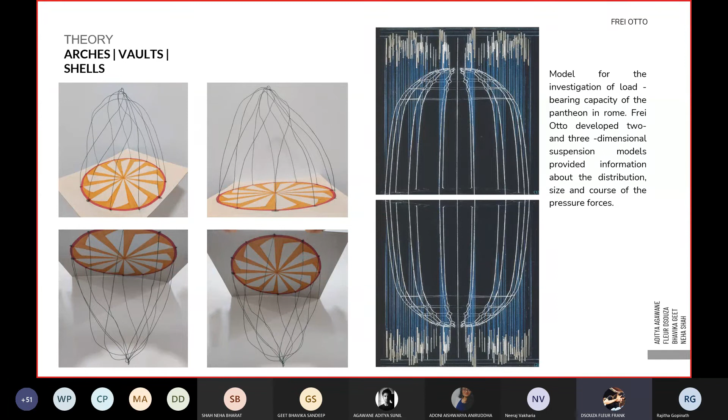But basically the principle is that when you suspend a string from one point to another, it forms a curve, and if you suspend many of them with their ends at the diameter of a circle, you get a dome. This would be the most ideal dome given the base diameter and the length of the string, and this should be used in construction because the forces would be resolved in the best way.

Next. Oh, by the way, I was Fleur. Yeah, thanks. Yeah, so I'm Neha.

So frame structures was another one of his principles or disciplines of construction. We did a little experiment with a balloon and nails to show the same.

I'll explain it. It works on a very simple principle: imagine you're trying to support a very thin, flexible or stretchable membrane on a slender supporting column. What will happen eventually is that the tip of the vertical element will pierce through the tent material. Instead, what he did is divide the tip into many different components, so the load concentration is distributed over many points and then finally transferred to the principal component.

So the hump tent from the 1957 exhibition, as explained earlier, works on the same principle. What is important to note here is that the point of connection where the individual component meets the surface of the membrane needs to be reinforced to increase and strengthen the effective area of contact.

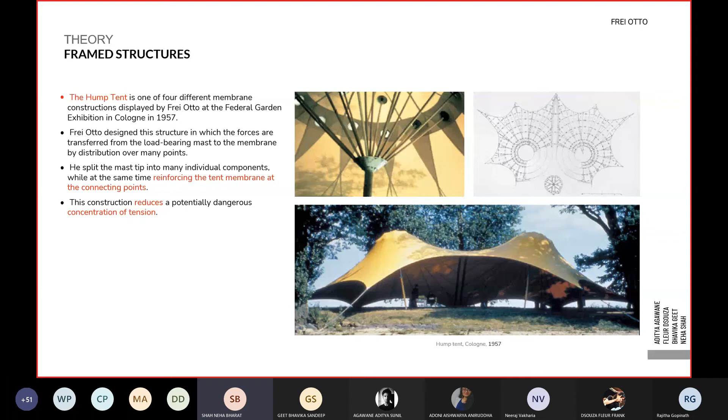Here we tried breaking down and resolving one of his works in the form of a GIF. It's the Mechtenberg Bridge from 2002.

So solid rods fan out from reinforced concrete bases and carry the bridge platforms. Hence, a planar mesh is formed by the fanned out compression bars in combination with horizontal tension bars. This fulfills a load-bearing function as well as serving as side rails enclosing the bridge. And the fans also intersect between the bridge bases to stabilize each other.

These were some other examples.

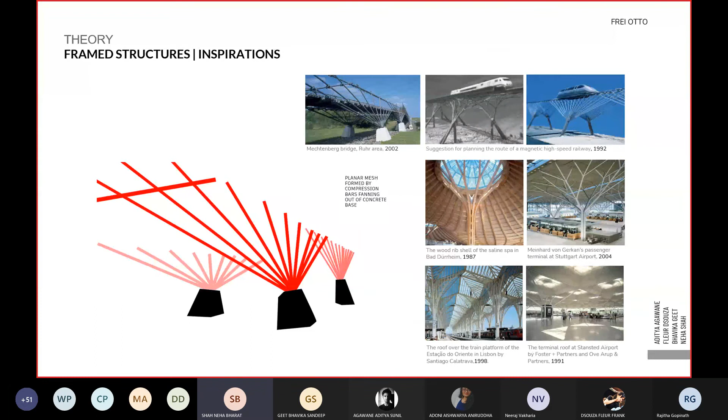Here it is visualized in a more powerful sense. Again, analysis of rotation degree of the angles against the generation level of the branches, right from 15 degrees to 90 degrees.

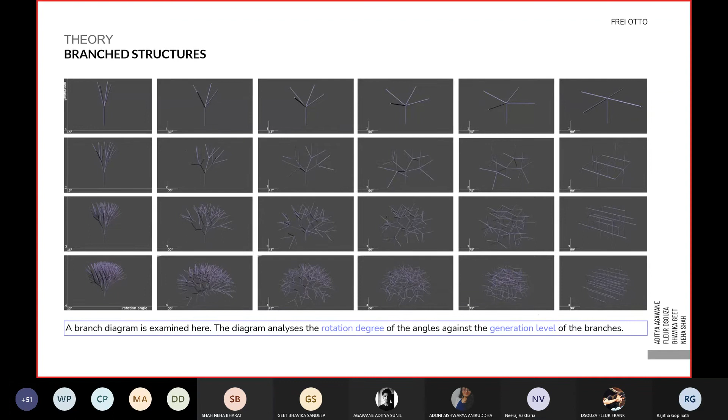Next slide. The pneumatic structures.

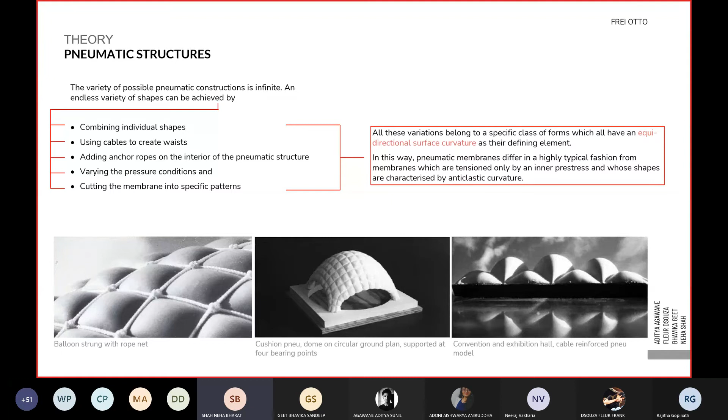So the next is the pneumatic structure. These are highly different from membranes, whose shapes are predefined and characterized by anticlastic curvature. I think these are the ones that have equidirectional surface curvature as their defining element.

He tried creative mediums to model the structures. For instance, he used soap bubbles, as explained by Fleur earlier. Can you play that video once? We also tried, since we were having fun with soap bubbles, one where there are hemispherical surfaces inside one another, where an equal internal pressure is maintained.

This one is a quite famous example: dipping cloth in plaster solution and hanging it upside down, waiting till it naturally acquires a shape, then inverting it to determine the exact shape of the domed surface structures in its best possible manner. We did try this with rice water, since we didn't have plaster at home.

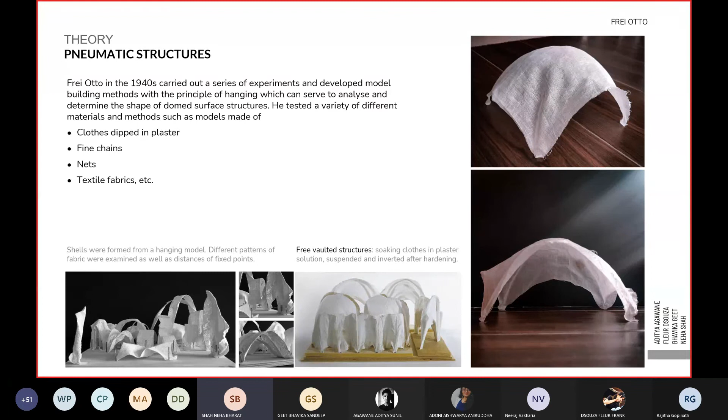Next is the convertible constructions. His experiments with these convertible constructions range from simple awnings to relatively complex domes. One important thing he stated was that these developments make it possible to realize that buildings are there only when they are needed.

So next was the umbrella. It is, I think, the oldest type of convertible roof construction.

Neha, are you there? I think one of you can continue.

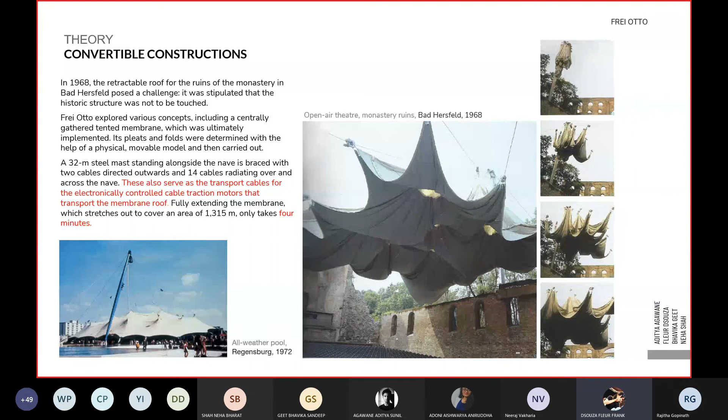In this case, Otto explored many various concepts, including a centrally gathered tented membrane, which was ultimately implemented. Its pleats and folds were determined with the help of a physical movable model and then carried out.

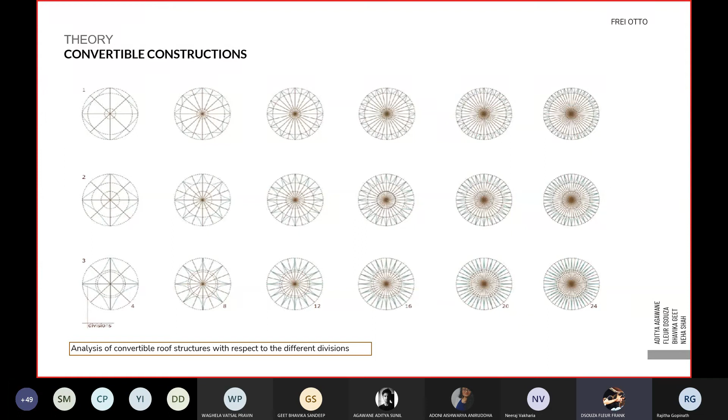This is the convertible structure filled with umbrellas. He created weather protection umbrellas for Pink Floyd's concert tour. The supporting structure lies above the umbrella membrane and creates a funnel shape, allowing rainwater to flow down through the mast. This is similar to the technique used in... I forgot what it's called.

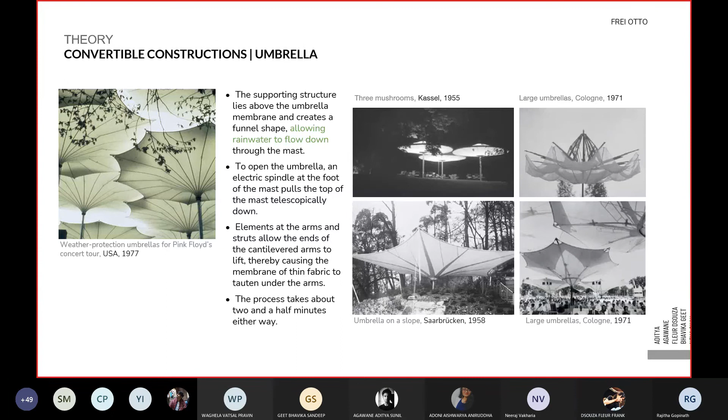The Crystal Palace. To open the umbrella, an electric spindle at the foot of the mast pulls the top of the mast telescopically down. The elements of the arms and struts allow the ends of the cantilevered arms to lift, causing the membrane of thin fabric to tauten under the arms. The process takes about 2.5 minutes either way. Next, the bibliography. Thank you.